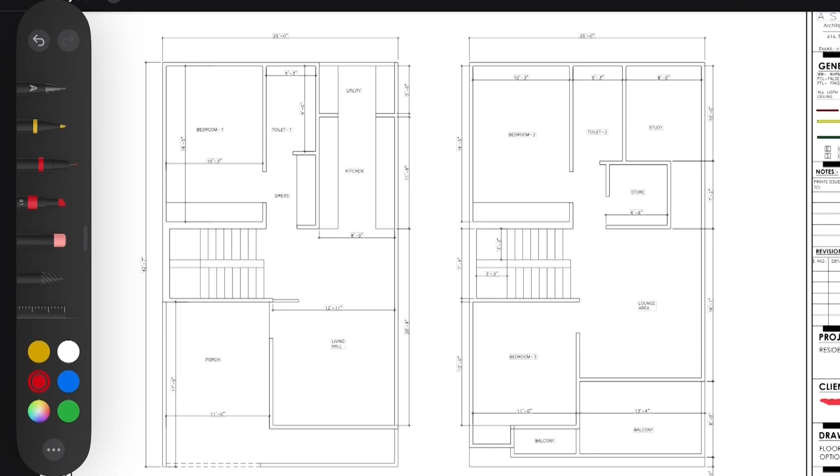Most 1000 square feet homes end up feeling cramped, not because of the square footage, but because of poor space planning and oversized furniture choices.

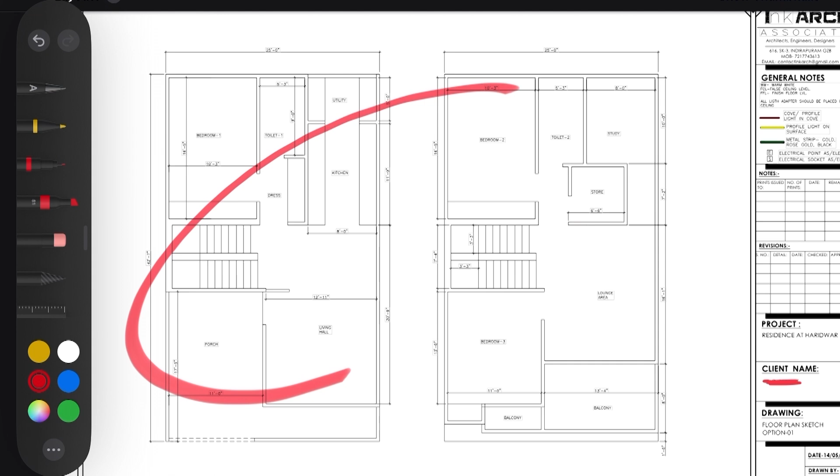In my previous video, I shared 3 conceptual layout options for a compact 1000 square feet space based on a real design brief. Today, I'm taking one of those layouts, my personal favorite, and developing it further with a detailed furniture layout.

Now this is my main entry, and this is my car parking area. I'm giving a door over here, but I would like to close it and give an alternative entry so that I can have a big piece of furniture over here. This can be my TV unit plus storage.

Another thing I would do is add a few steps over here so that I can accommodate my seating area right at the entry, accessed from here. Now this is my sofa, and you can have your center table over here. Another access that I want to give is from here.

So this is my staircase. I would like to give them a clear head height over here, so adding a few steps over here. This is my dining area, so I can place my dining chairs like this, and this can be my dining table. Now let's see how the flow of space is in this area because of this furniture layout.

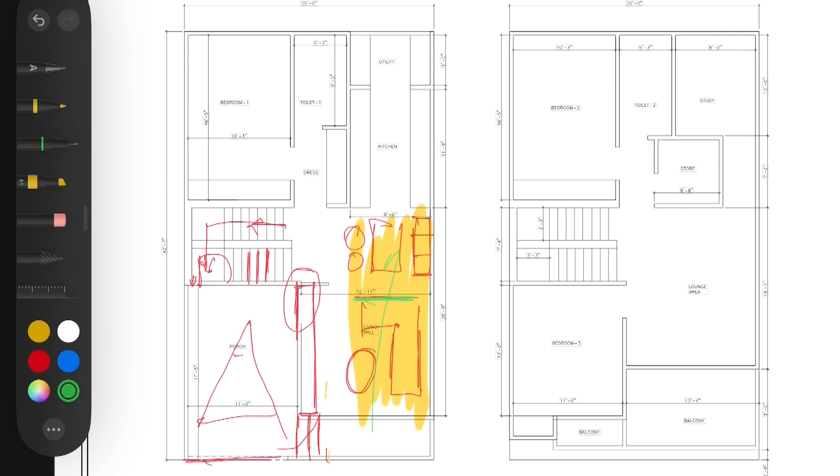If I place my furniture like this, I am going to see the back of the sofa, which creates a blockage of space. So I want to give them a feel of air. Rather than placing my sofa like this, I am going to place it like this, so I am seeing a flow of space like this.

Let's see the kitchen now. This is my platform area. I can place my refrigerator over here, but I am only getting 4 feet of passage, so I would rather keep my refrigerator here so there is no congestion at the entry. This is going to be my microwave plus oven, this is my hob, and this is my tall or pantry unit. So this is my platform, which is a decent platform area.

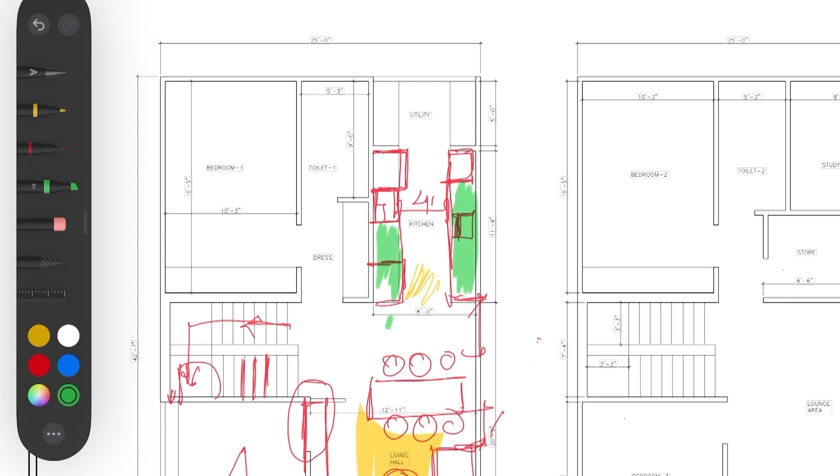Now let's discuss the utility. In the utility, I'm going to place my sink over here so that it is not visible from here, it is hidden. Then here can be my washing machine and my other stuff for the janitor. So this can be a good utility area.

Let's discuss the master bedroom now. This is my entry for the master bedroom, and this is my dressing area. I can even create a wardrobe or a dressing, whatever you want, so I am creating a dressing over here.

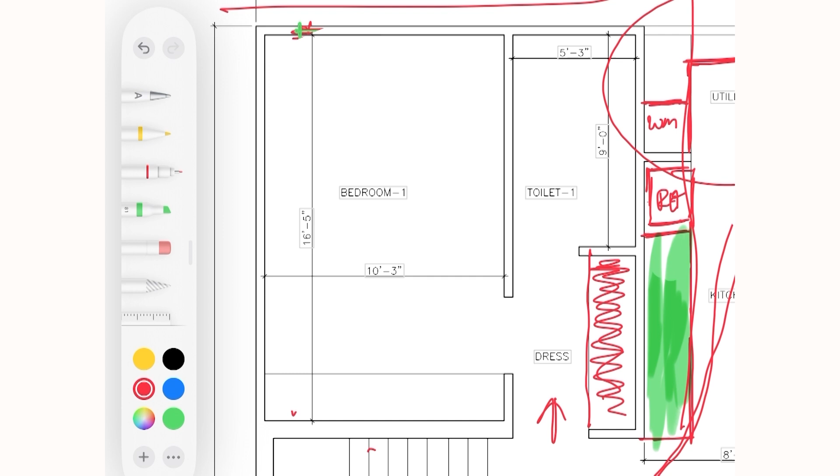This can be my toilet connecting with the bedroom. Here can be my wash basin or the WC. Because this is 9 feet, I'm going to keep my wash basin over here. This can be my WC, and here is going to be my shower cubicle.

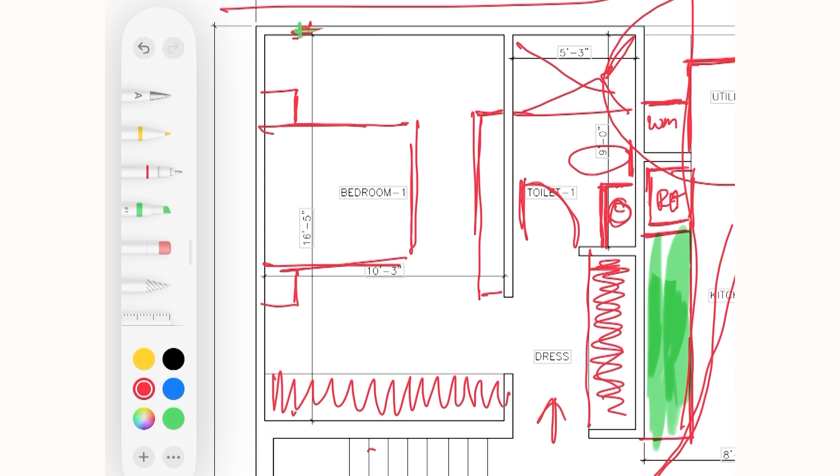For the bedroom, I can see it is good storage, so this is my storage. Now this can be my bed with the side table, and this can be my TV unit. You can create your study or your dressing table over here, so this is one good space for that.

Let's discuss the upper floor now. This is my bedroom. I'm going to put my side table after 2 feet, and this can be my bed. So my TV is going to be here, and this can be my good dressing table, near the window. So this is the layout for my bedroom.

Now let's discuss this bedroom. It is similar to the lower floor level. This is the side table, this can be the wardrobe, this is the TV unit, and here I am going to place my dressing table, because this is a storeroom now.

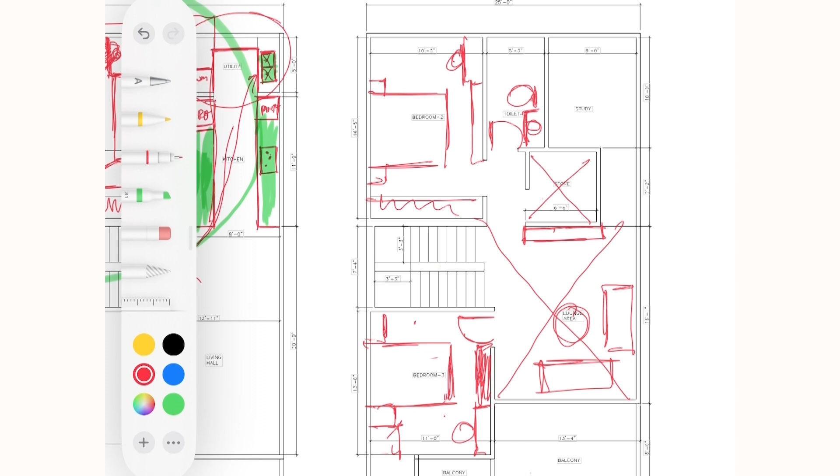Now this is a common toilet. The layout is going to be the same as the lower level. This is the wash basin area, this is the WC, and this is my shower cubicle.

Now this is my study room. So this is my chair, and this is going to be a good window.

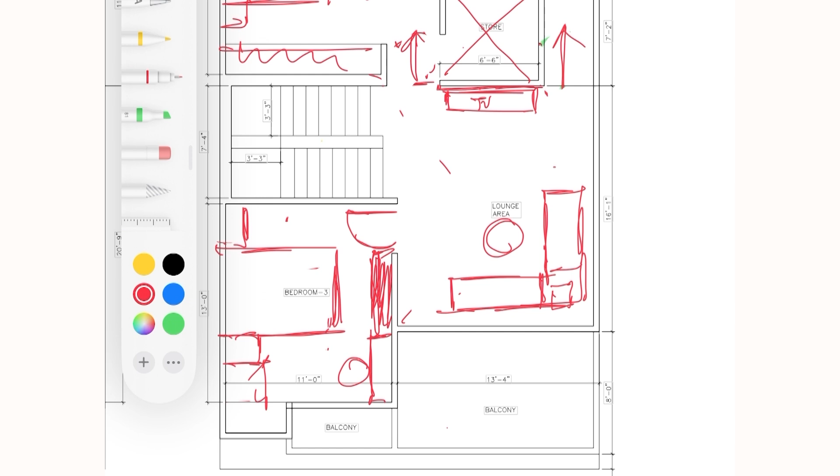Now this is my lounge area. I'm going to place my sofa like this with the side table over here, or you can place your L-shaped sofa, whatever you want. And this is my TV area. I can even place my furniture like this, or rather than placing a TV unit over here, I'm going to create a console, a beautiful focal wall.

So if somebody enters, that person sees a beautiful focal wall. And I am going to place my sofa like this.

And this can be my sliding folding partition, so that my inside and outside can be connected. Once it is open, this is one big hall, and this is going to give an amazing feel inside.

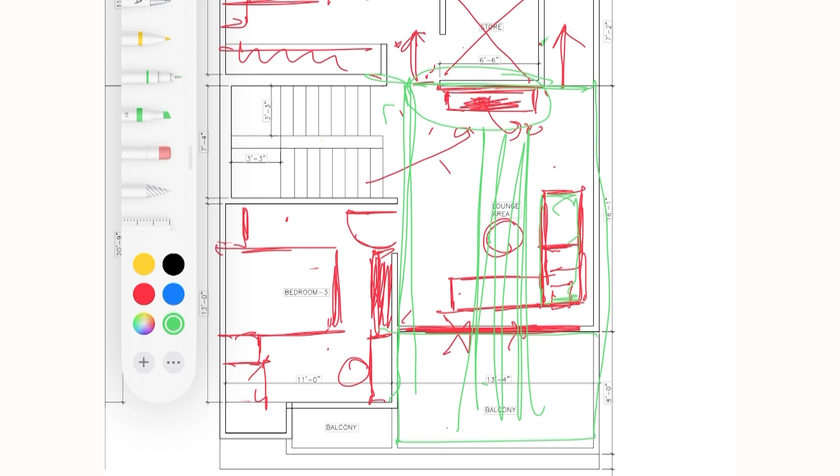Now let's see a conceptual furniture layout I created for this space. So this is your step. This is for the formal sitting area. Now I'm creating a minimum 3 feet 3 inches passage over here. This is my sliding window, which is fine.

Now this is my sofa. This is the center table. Now this is my TV unit. I can easily accommodate 2 poufs over here. When it is needed, it is here, or when it is not needed, it is here.

This is my storage. This is my other entry for the house. See, I'm having enough space over here, so I can easily create one shoe cabinet over here. Now you have another entry.

So this is looking clean. Now this is your formal entry. This is your informal entry.

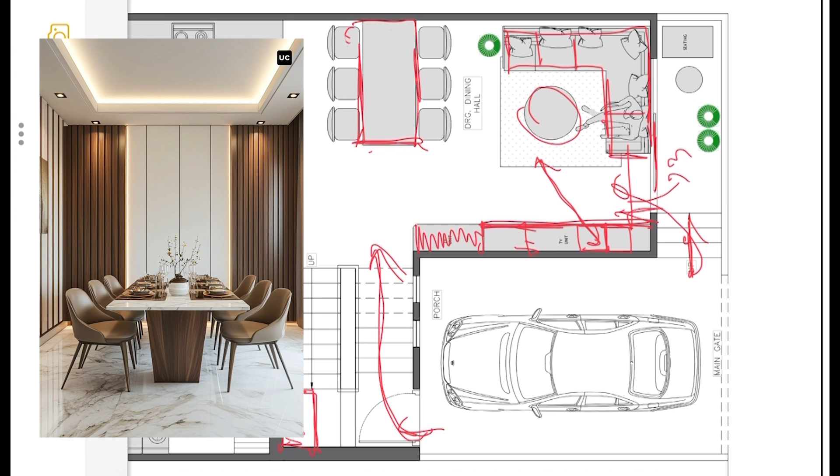Now, rather than placing my dining table like this, I placed it like this because most of the time my chairs will be inside. So this is going to give a cleaner look rather than the other option. So this is the better layout for the space.

Now let's see in the kitchen. Now this is my refrigerator. This is my pantry. This is one platform. This is the microwave area. This is my hob area. This is the sink. Double bowl sink I can easily accommodate, and this is my good utility.

Now this area is having a dress, and this is my washroom. I'm having my wash basin over here. This is my WC, and this is my good shower area.

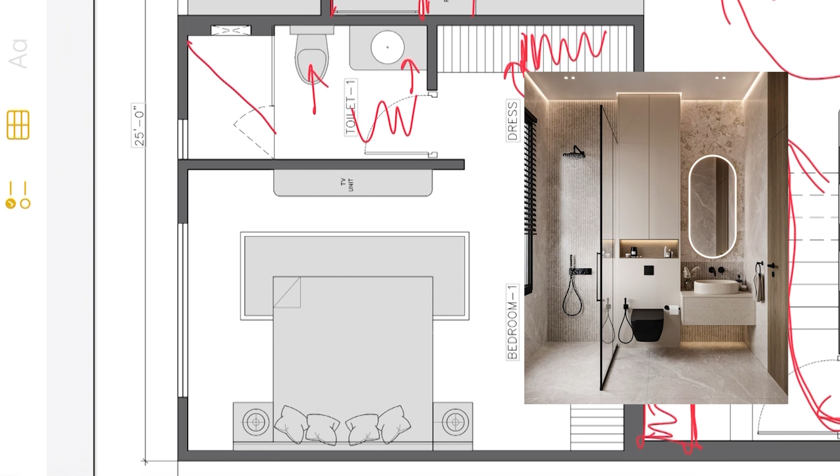In the bedroom, I'm keeping my wardrobe like this so that I can use this space too. I can use it for hanging clothes, or I can create a good shoe cabinet over here, and this can be my good wardrobe. This is my bed, and yes, here is going to be my accent chair.

Now this is the furniture layout for the lower floor. Now let's discuss the above floor level.

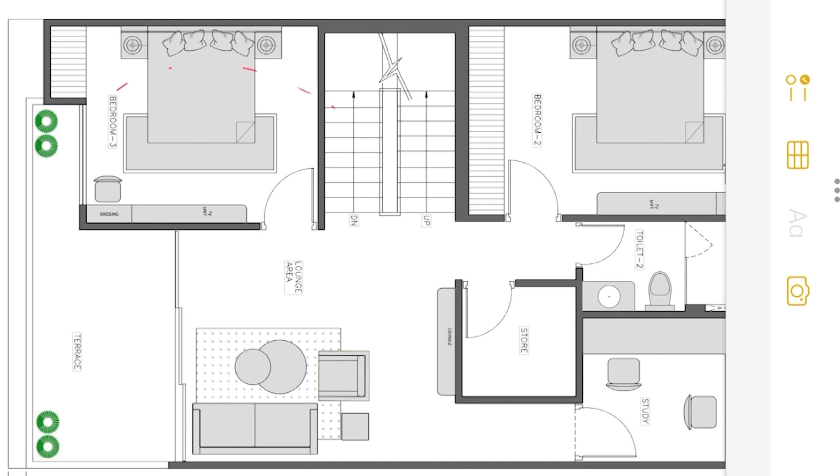So like I've told you, rather than creating a TV unit here, I'm creating one good console. This is my sofa. This is my single sofa. And this is sliding folding.

It can be easily folded on this wall. And this is one good indoor outdoor space. So once it is open, you get a lot of space.

This is my passage for the study area. This is my passage for the toilet and the bedroom. This is my storeroom. And this is my bedroom, another bedroom. And this is the storage for the bedroom. And this is the TV unit.

This is my entrance for the study area. I'm going to place my furniture like this. These can be my 2 chairs for the study. Now this is my entry for the washroom. This is the entry. This is the wash basin. This is the WC. And this is my shower area.

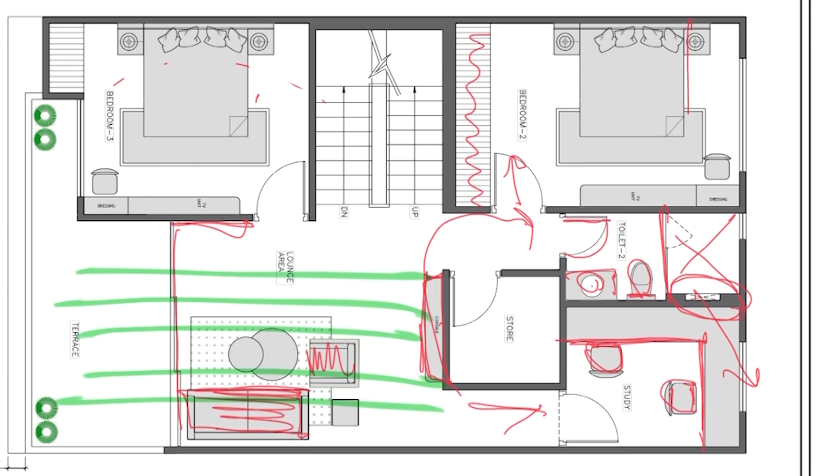Now this is my entry for the bedroom. This is my wardrobe. This is my bed with 2 side tables. I'm going to keep my TV unit over here, and this is my dressing table, which is near the window, which is a nice thing.

This is my another bedroom. I'm starting my bed, maintaining a proper distance from the wardrobe so that it can be easily opened. This is my side table, and this is my bed. You should always align the center of the TV unit with the center of the bed.

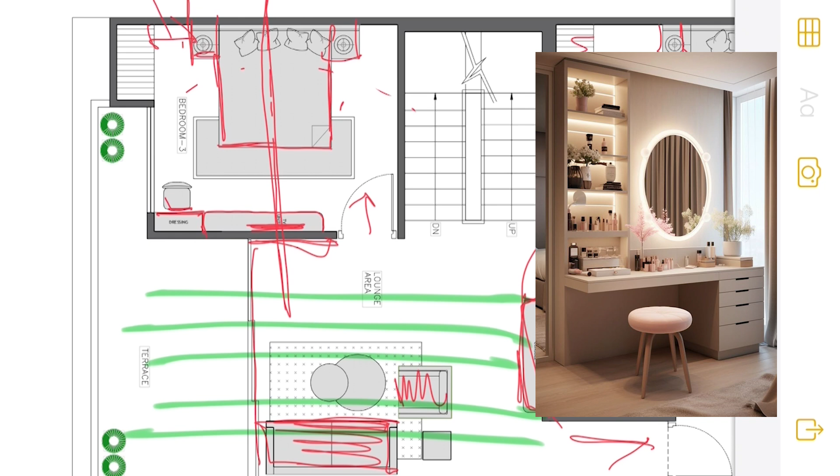Now this is my dressing table. It's going to be here, which is also near the window. So there is ample amount of natural light inside the bedroom.

So this is how the final furniture layout is going to look like. I have carefully planned the furniture placement to enhance circulation, define zones clearly, and also maintain a visual breathing space.

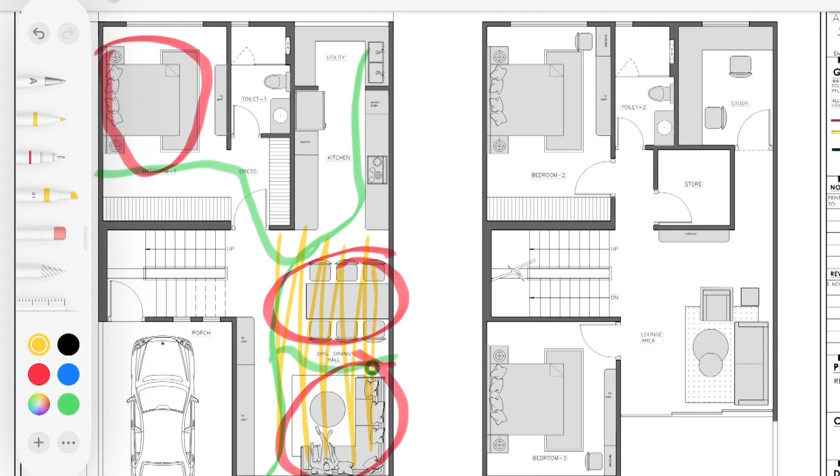Now here is a thought. What if I take this plan to the next level and show you how I would actually design the interiors? From finishes and colors to lighting and styling. I can even create a mood board or conceptual presentation for you all.